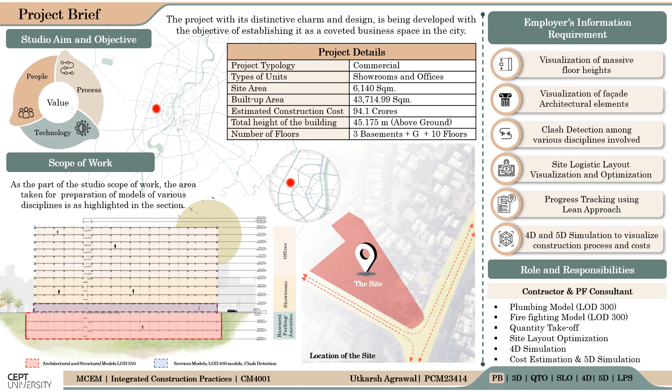As part of the studio, I performed the role of contractor and plumbing and firefighting consultant. The responsibilities as part of my role were developing a LOD 300 plumbing model, developing a LOD 300 firefighting model, quantity takeoff, site layout optimization, 4D simulation, cost estimation, and 5D simulation.

These are the schematic and rendered views of the firefighting 3D model developed, and we modeled the pipes and firefighting accessories as part of our scope of work. The process followed for modeling includes importing levels and grids, followed by importing the 2D plan in Revit, and further modeling as per the model element author. Some of the constraints faced during the modeling process include lack of prior experience of 3D modeling, absence of section drawings, and inability to understand the joineries, which increased the delay in the modeling.

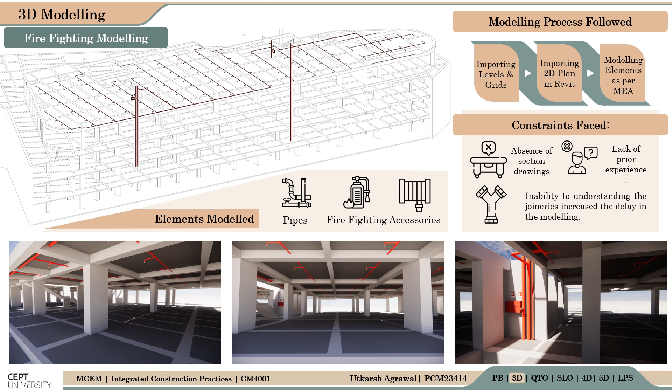These are the schematic and rendered views of the plumbing 3D model developed, and we modeled the pipes, plumbing fixtures, and plumbing accessories as part of our scope of work. Some of the constraints faced during the modeling process include lack of prior experience, unfamiliarity with the software, unclear details in 2D drawings, absence of section drawings, and missing plumbing fixtures specification in drawings.

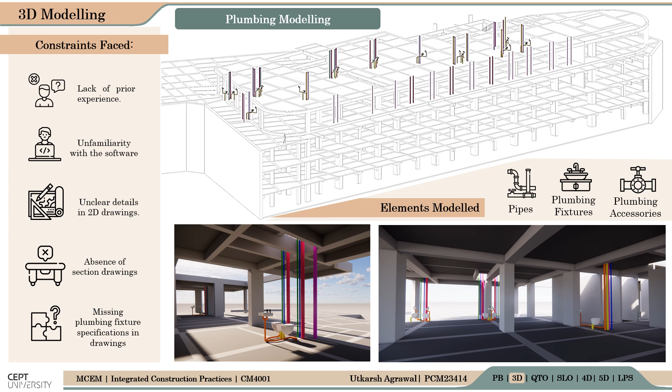This graph shows the cost comparison of the various elements after the quantity takeoff is done using manual and Revit quantity takeoff. The major variation is marked in red and is because of the variation in quantity takeoff. We can also see the exemplar BOQ prepared for AAC block. This shows that Revit enables precise cost estimation for complex architectural elements such as mullions and columns during the design phase, offering a clearer understanding of the actual project cost early on.

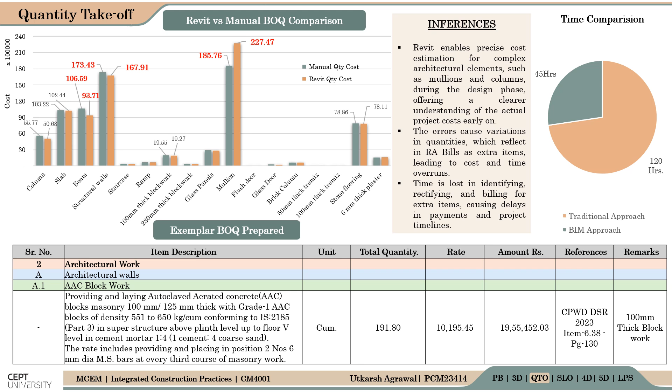The errors cause variation in quantities, which reflect in RA bills as extra items, leading to cost and time overruns. Time is lost in identifying, rectifying, and billing for extra items, causing delays in payments and project timelines. The time comparison of the two different approaches shows that the traditional approach requires an additional 75 hours for the same scope of work.

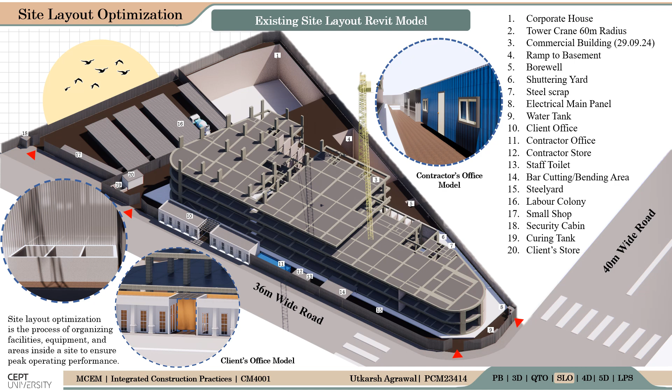This is the existing site layout with all the components marked along with it. The rendered views of the curing tank, contractor office, and client office are also showcased here. By studying and analyzing this, some of the issues identified are inadequate storage for reinforcement bars, unsegregated vehicular and pedestrian movement paths, no provision for a dedicated scrapyard, no barricading around the excavated area, inappropriate assembly point, and absence of a medical or EHS room.

For the proposed site layout, the critics were resolved and also POT analysis, or path of travel analysis, was done. For the analysis, the distance of the construction site from each considered parameter has been taken from the center, considering the fact that the manpower would be working anywhere on the entire floor, so that the center point would give the average distance of travel to the destination. The speed of 1.33 meters per second has been considered for calculating the time of travel.

The cost of optimization for each component was also calculated, and it was observed that a huge cost is associated with shifting of the client store and curing tank, as they are masonry structures, and demolishing and reconstruction of the same increases this cost. A major cost is also associated with shifting and enhancing the steel yard. The shifting and proposal of temporary structures is very minimal in comparison with the permanent structures.

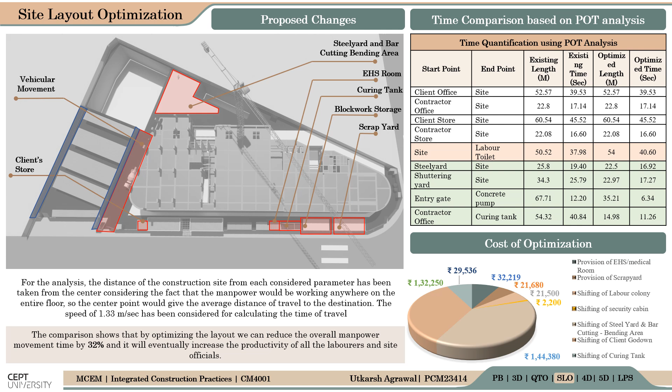For 4D simulation, a 6-week lookahead plan was created and tracked using the Last Planner System. The scope of work can be seen in the top right corner using the Navisworks and Synchro Pro software. First, the construction sequencing was done, and further, after the tracking in Synchro Pro, the comparison of plan versus actual was done, and it was observed that in the first week, all the activities were as per the planned schedule, but in week 2, there was a quarry strike which caused delays in the concreting activities planned, but no delays of more than 2 days have been observed.

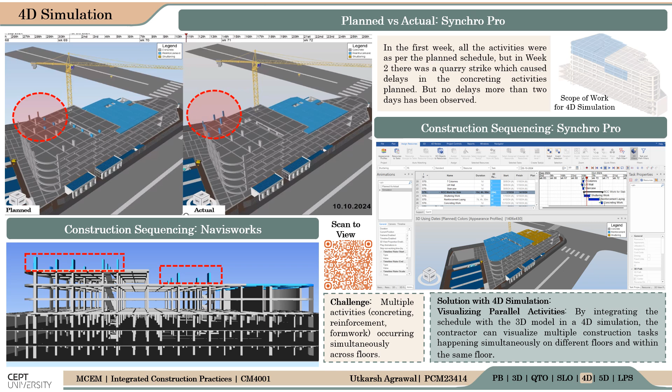Using Navisworks, a challenge was also resolved, which is multiple activities occurring simultaneously across floors. The solution was that by integrating the schedule with the 3D model in a 4D simulation, the contractor can visualize multiple construction tasks happening simultaneously on different floors and within the same floor. The QR can be scanned to see the various simulations.

For 5D simulation, the cost estimation for the various activities was done and added in Synchro Pro for earned value analysis. The assumptions considered were: productivity from site has been taken separately for reinforcement, shuttering, and concreting activity. The number of laborers was calculated based on the productivity, for vertical and horizontal elements differently. Only labor cost has been considered as extra for delayed activities, and the cost of materials has been taken as the same as was used for preparation of the BOQ in quantity takeoff.

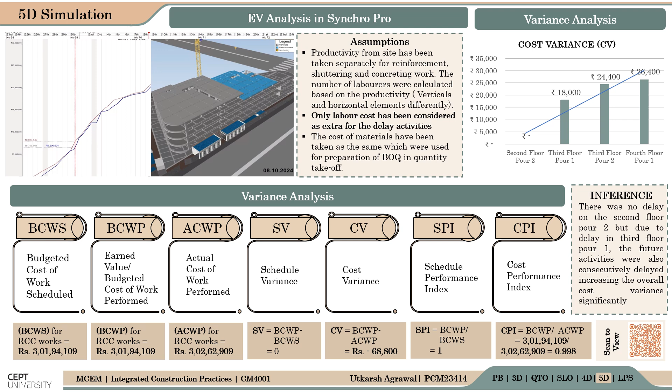The variance analysis shows that there was no delay on second floor, pour 2, but due to delay in third floor, pour 1, the future activities were also consecutively delayed, increasing the overall cost variance significantly. As the scope of work was completed within the stipulated time frame, the earned value is the same as the budgeted cost, and further the SPI is 1. Due to minor delay and increased labor cost, the cost variance is minus 68,800 and CPI is 0.998. The QR can be scanned to see the simulations.

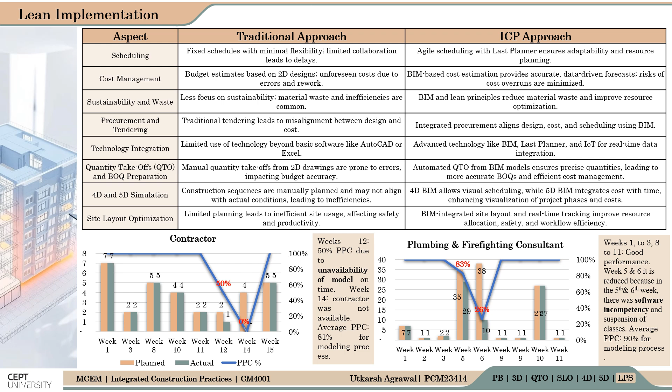Further, in constraint mapping and PPC calculation in the Last Planner System of the contractor, it is observed that in week 12, 50% PPC is there due to unavailability of the model on time. But in week 14, the contractor was not available, and the average PPC is 81% for the modeling process. For the plumbing and firefighting consultant, it is observed that in weeks 1 to 3 and weeks 8 to 11, there is good performance. But in weeks 5 and 6, it is reduced because there was software incompetency and suspension of classes. The average PPC came out to be 90% for the modeling process.

In conclusion of this portfolio, from 3D modeling, we enhanced spatial understanding by developing detailed 3D models of plumbing and firefighting systems. From quantity takeoff, we developed skills in preparing BOQs based on model data, enhancing the reliability of cost projection. From site layout optimization, we enhanced site safety and spatial planning by using 3D layouts to manage safety zones, access paths, and storage areas through BIM. From 4D simulation, we developed skills in creating 4D simulations by linking 3D models with schedules, improving construction sequencing, identifying conflicts, and enhancing communication with stakeholders.

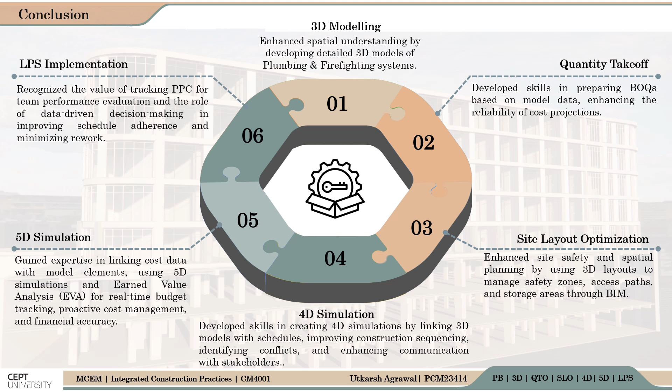From 5D simulation, we gained expertise in linking cost data with model elements using 5D simulation and earned value analysis for real-time budget tracking, proactive cost management, and financial accuracy. From LPS implementation, we recognized the value of tracking PPC for team performance evaluation, and the role of data-driven decision making in improving schedule adherence and minimizing rework.